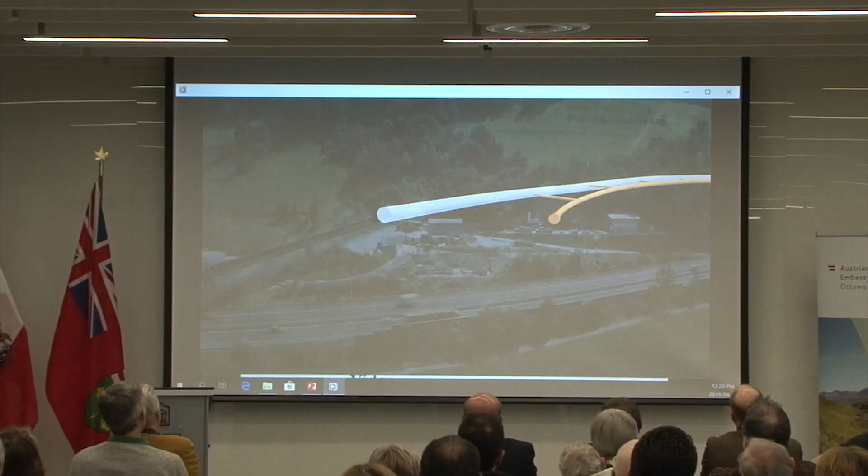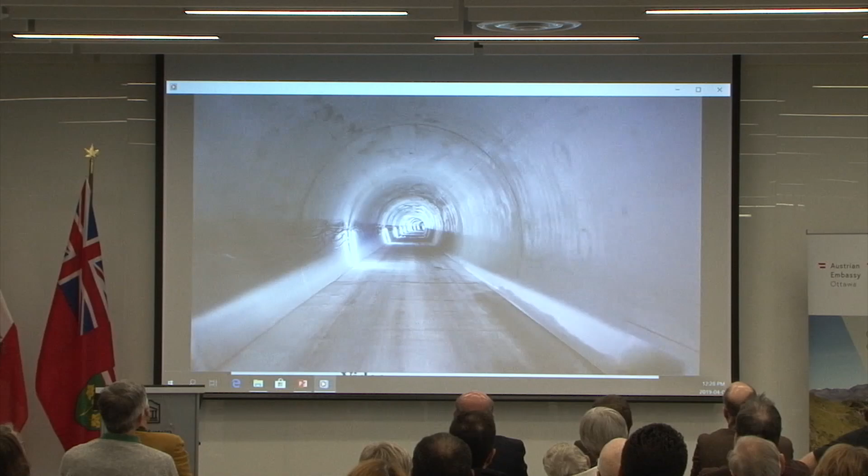Cross tunnels connect the bypass tunnel at 333-meter intervals with the new emergency tunnel, thus bringing the railway bypass tunnel in Innsbruck, which has been operational since 1994, into compliance with subsequent safety requirements. This was the reason for constructing the emergency tunnel.

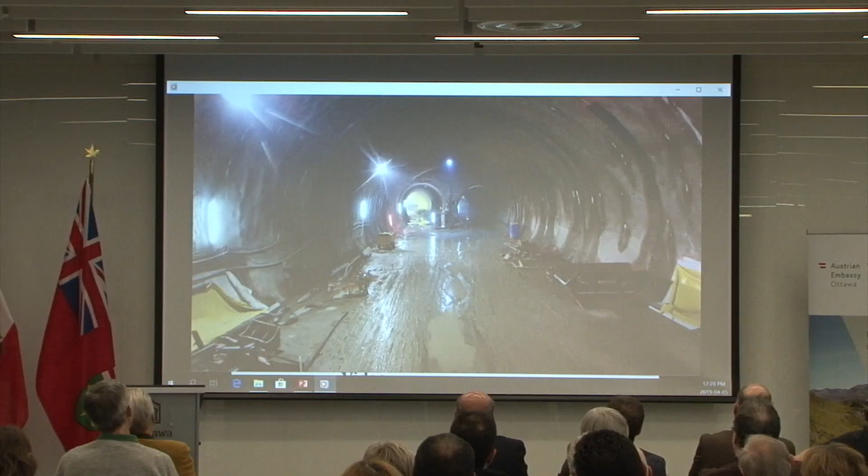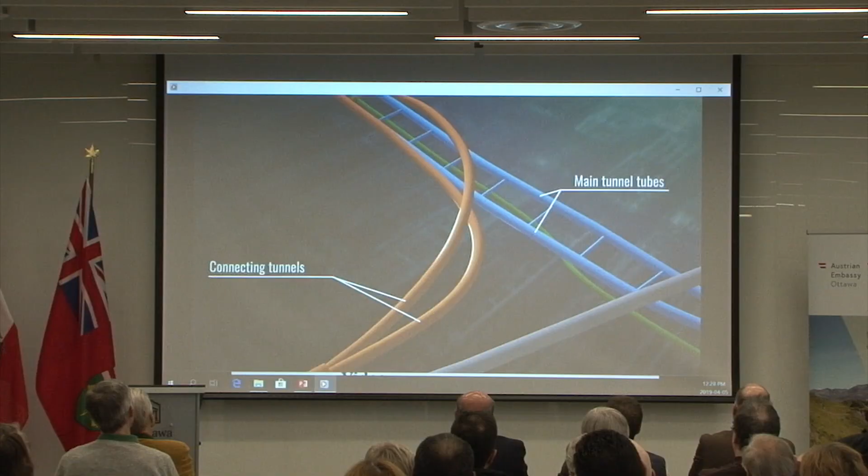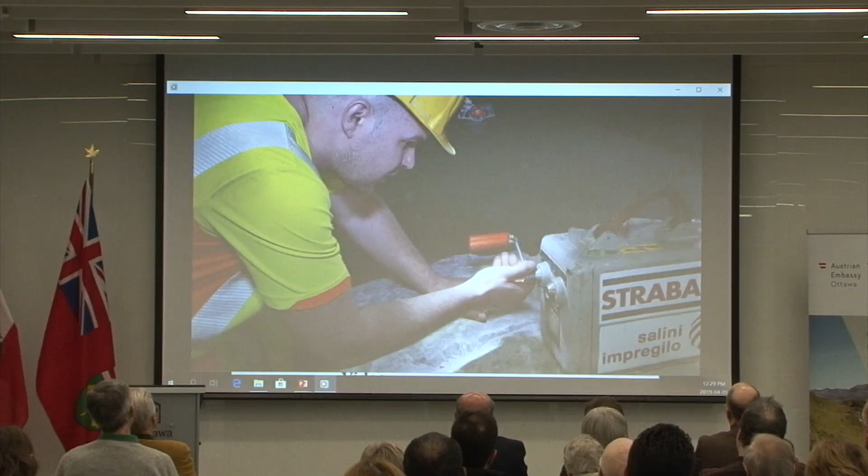Here, about 160 meters below the town of Aldrans, 2 connecting tunnels branch off from the existing railway bypass in the direction of the Wipp Valley. These two tunnels create a crossover in order to allow a fluid transition between the right-hand running used in Austria and the left-hand running used in Italy. The two connecting tunnels took only 2 years to be constructed. The breakthrough took place in the summer of 2017, creating an underground connection between the Inn and the Wipp valleys.

Times like these give the miners and their colleagues pause, and relief is plain to see on their faces.

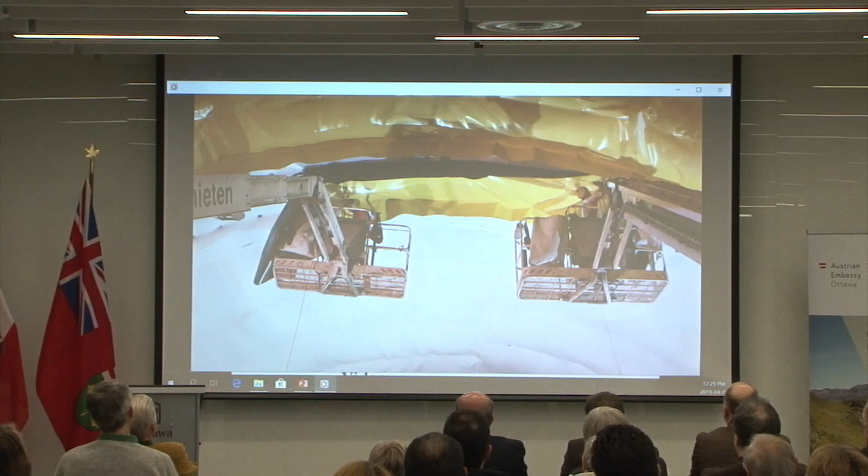Once the excavation works are completed, the internal lining of the connecting tunnels will begin. Inflowing mountain water is drained off to the tunnel invert by means of an insulating film, keeping any moisture away from the tunnel. The reinforcement is then assembled. In blocks of 12.5 meters each, lattice mats and steel bars are woven by hand into a mesh, which gives the concrete stability and durability.

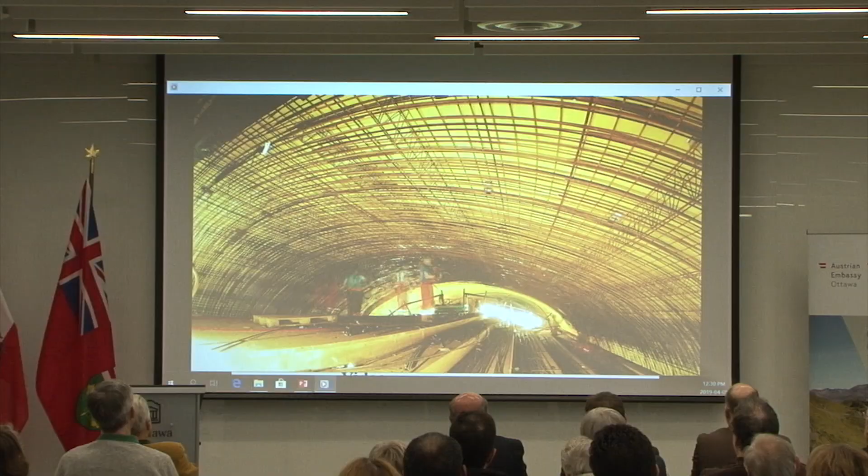The tunnel inner wall is filled with concrete block by block using mobile carriage molds. The consistency of the concrete, the placement and compaction are precisely coordinated so that the concrete has no defects and reinforcement is completely embedded.

After the formwork has been stripped, the concrete is treated with a foil seal. This controls the temperature and humidity of the concrete and minimizes cracking.

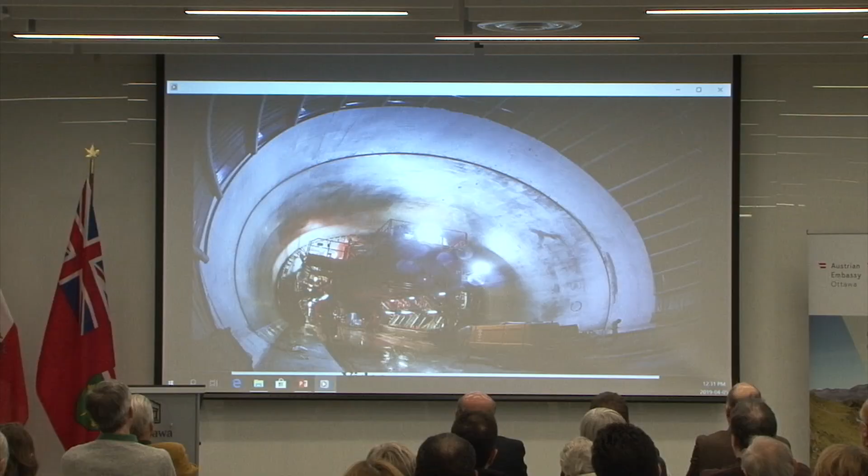For the first time in tunnel construction history, the Brenner Base Tunnel is being built to last at least 200 years.

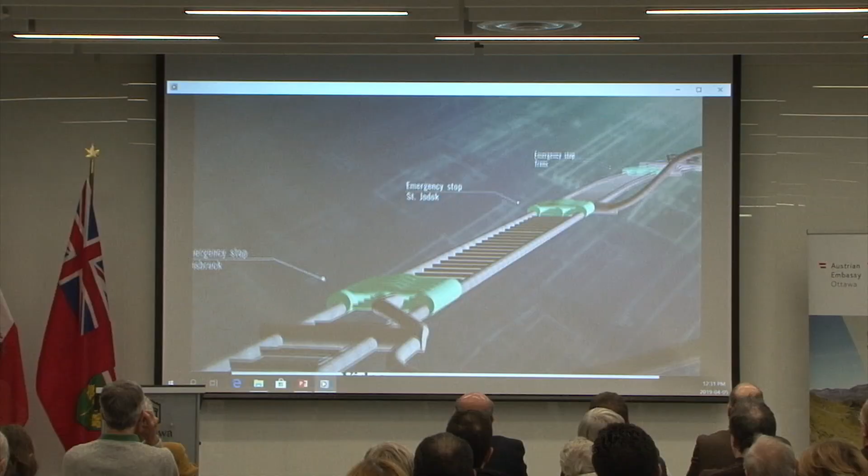The exploratory tunnel is located centrally between the two main tunnels and about 12 meters below them. This is where the first TBM in Austrian territory was used for excavation work.

Since November 2015, the TBM named Günther has been cutting its way through the rock, driving 15 kilometers of the exploratory tunnel towards Steinach am Brenner, starting from a chamber below the town of Patsch, which is connected to the surface by the Ahrental access tunnel.

The exploratory tunnel provides information on the geological characteristics of the rock mass, and will therefore make the subsequent construction of the main tubes efficient, fast, safe, and cost-effective.

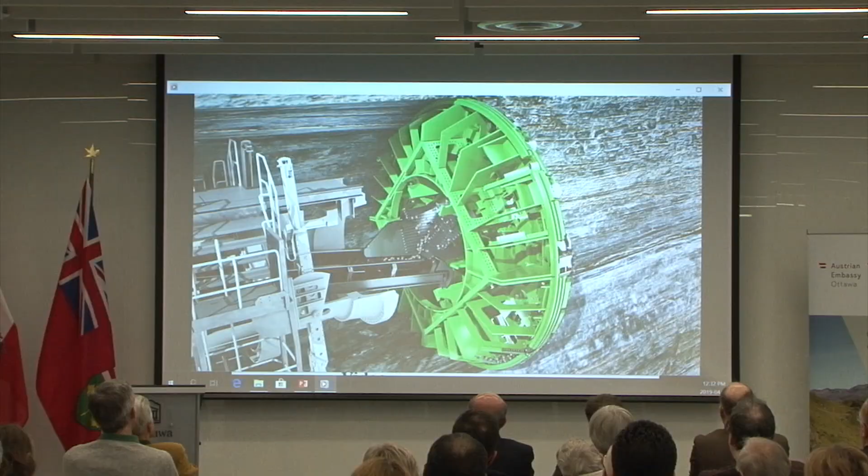The TBM is 180 meters long and has a diameter of 8 meters. The boring machine head is equipped with disc cutters, which rotate slowly and constantly, while the TBM pushes hard against the rock face, digging its way through the mountain.

Behind the cutter head, the backup provides for consolidation work through installation of tunnel linings and anchors, steel ribs, reinforcing steel mats and shotcrete.

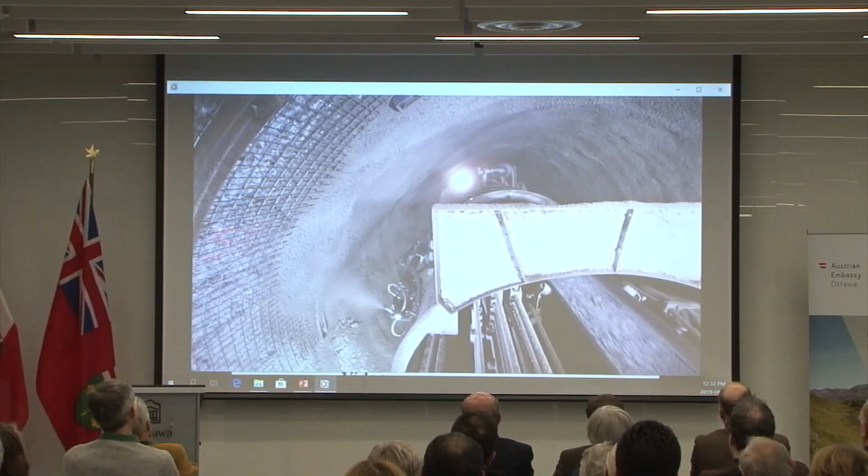The tunnel floor is built with prefab concrete elements, the so-called tubbing rings.

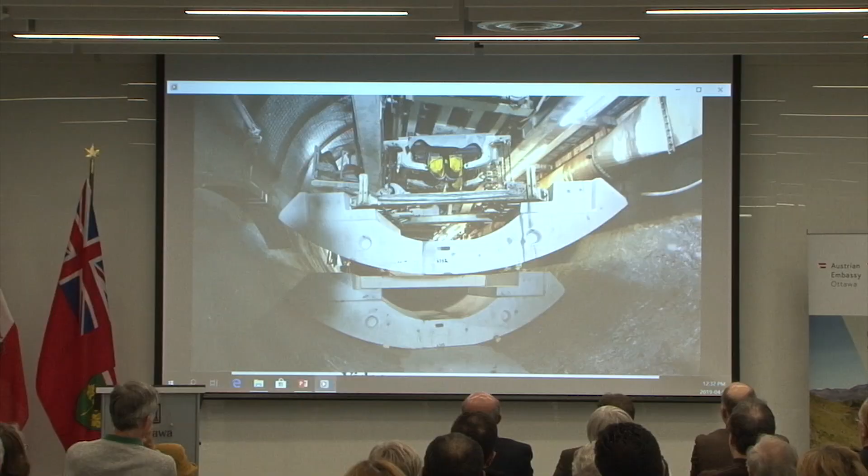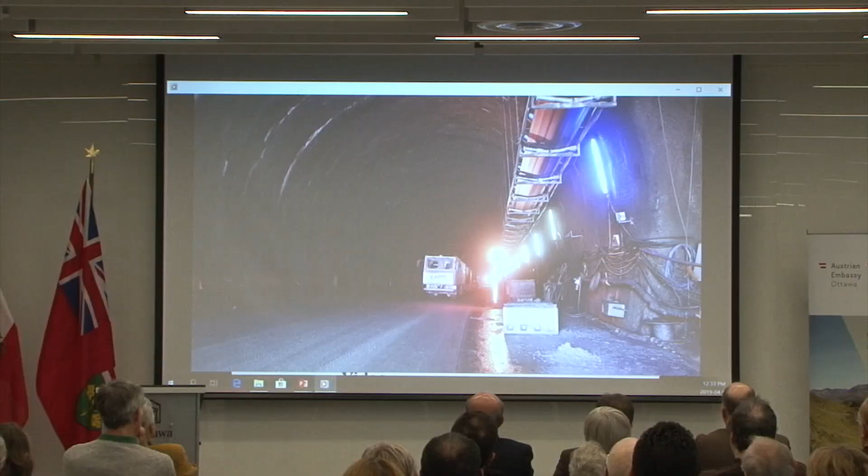Fully automated multi-service vehicles shuttle back and forth to the TBM to supply construction material, concrete, and prefab elements.

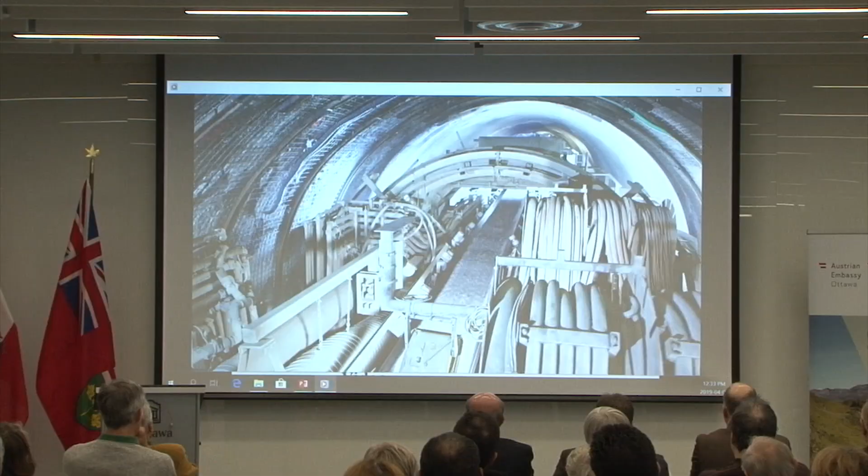Tunnel spoil is transported on a conveyor belt system. All material taken from the mountain must be returned to nature.

Here in the Ahrental Valley, approximately 2.6 million cubic meters of excavated material will be relocated along the Brenner Highway. Great care is taken to ensure that the disposal site is embedded into the landscape in the best possible way, to create new available land in the future that will be gradually replanted and covered with green growing things.

Another construction site for the Brenner Base Tunnel is located in the municipal area of Steinach am Brenner, in the district of Wolf, where the Wolf construction lot was completed in the summer of 2017.

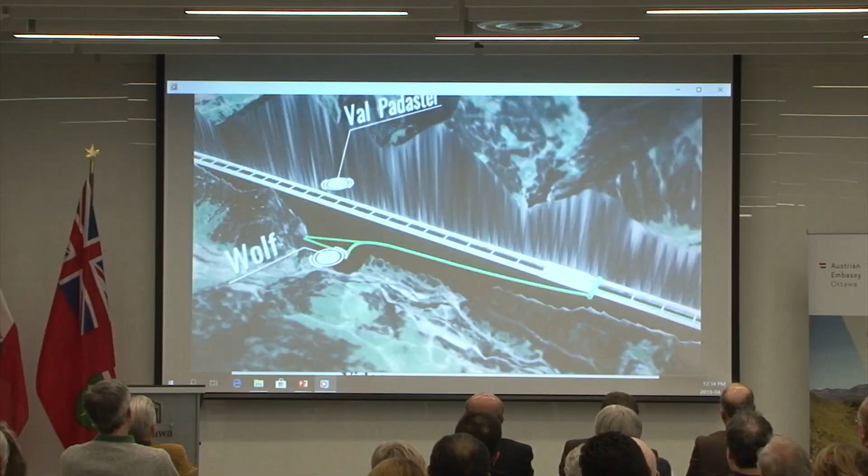The works of the Wolf construction lot, which included the construction of the 4-kilometer-long access tunnel, a large underground chamber, and 1.2 kilometers of the exploration tunnel, started in 2013 and were completed in the summer of 2017.

Subsequently, further excavation work northwards and southwards, the construction of the Sant Jodok emergency stop and of the stretch of the exploratory tunnel towards the Italian border will start from here. Soon, several tunnel boring machines will be put into service at this site.

The largest disposal site for excavation material, the Padaster Valley, is also located in Steinach. After the completion of construction works and revegetation, this deeply cut valley will become arable land.

The Padaster Brook will be rerouted to a new bed on the surface, and new wooded and pasture areas will be created. About half of the excavation material of the Austrian project area will be deposited here.

The excavation material is transported to this disposal site using underground conveyor belts, and the local residents hardly notice it.

People always ask me, what are compensatory measures? Working in BBT SE, we are aware of the effects of major construction sites. Therefore, we do a lot to compensate those impacts.

This is also why we finance and implement significant improvements to habitat and nature in our project area. Habitats, wetlands, and moorland are revitalized and expanded as recreational areas for the population.

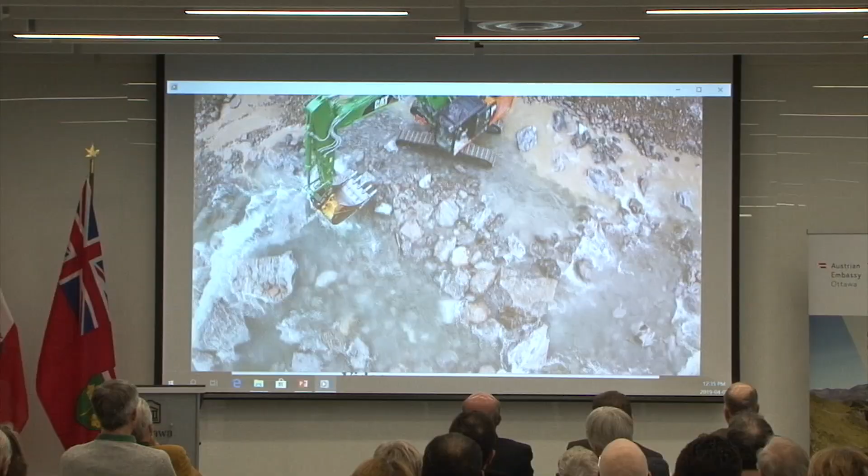The river courses of the Isarco River and the Marita and Sil brooks are being rerouted. This means fish can swim upriver again and reach their spawning grounds, and these mountain brooks will regain their original characteristics. In the next few years, a total of 250 such compensatory measures will be implemented.

In the BBT tunnel world in Steinach am Brenner, near the valley station of the Bergeralm ski slope, information about and closer glimpses of the major Brenner Base Tunnel project are available throughout the year.

In 800 square meters of exhibition space and in the display tunnel, you can experience tunnel construction in a fun and instructive way and get the latest information about the project.

Not far from the tunnel world, the new circular walking path in the Padaster Valley offers a spectacular view over the disposal site and provides information on the spot about the site and the nature-friendly measures which were carried out.

Once a year, the tunnel construction sites in North Tyrol and South Tyrol are opened for interested visitors, such as in October of 2017, when thousands of visitors got the chance to see the fascinating world of tunneling up close on the Ahrental, Mules and Isarco River underpass construction sites.

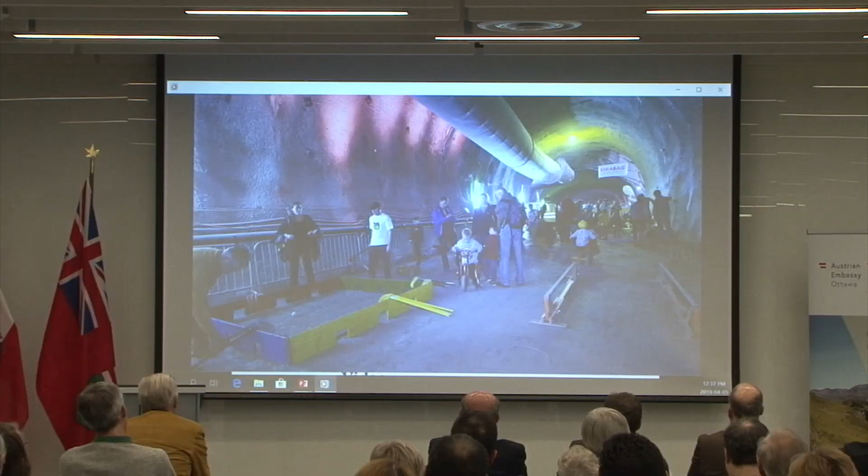Employees of BBT explain facts about tunneling, geology and topography. Tunnel tours make it possible to view the work in progress in the project area. A special entertainment program for all ages makes the open tunnel days a special experience. And who knows, perhaps someone will have the chance to find their true calling.

So this gives us a little bit of flavor about the project itself, and now I would like to continue with the presentation, talking a little bit more into detail about the different issues regarding the project itself.

It is a base tunnel. We are trying to reduce actually the slope, the existing slope of 28 per mil to approximately 7 per mil. So it is a real base tunnel.

As you saw already, there are 3 tunnels. Why? The so-called exploratory tunnel is used on a worldwide level the second time. The Channel Tunnel between France and England also has 3 tubes over there. But the third tube, the middle tube, is used for maintenance and for emergency purpose.

Our tunnel is used for, first of all, exploring the rock mass. Secondly, for additional services during the construction phase. And finally, it's a possible tunnel taking all the rail equipment we need, the machinery, the ventilations and so on - they can be placed over there in order to have no interaction with the existing, under operation, main tunnels. And this gives us a big advantage regarding other big base tunnels like the Gotthard tunnel.

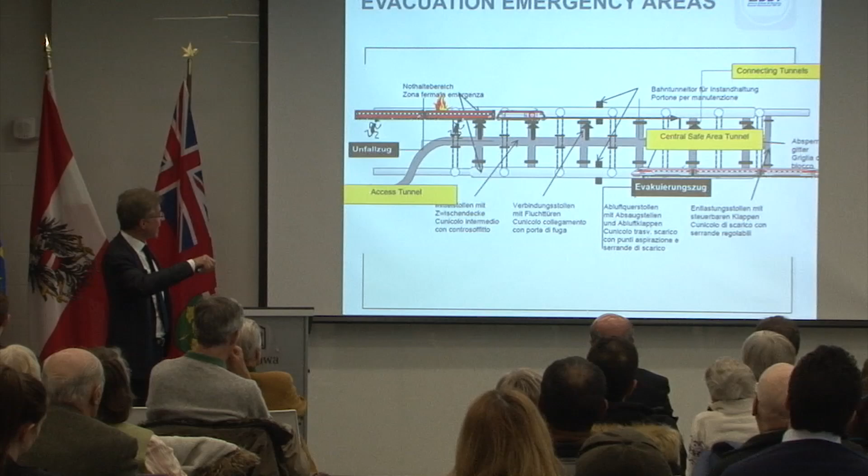If a train runs into the emergency zone with a burning fire on the train, then the passengers can go out, they can walk to the central safe area, and another so-called evacuation train can come and pick them up. With our specific access tunnel directly connected to the central safe area, we are able to take the passengers out also by car. This is a big advantage.

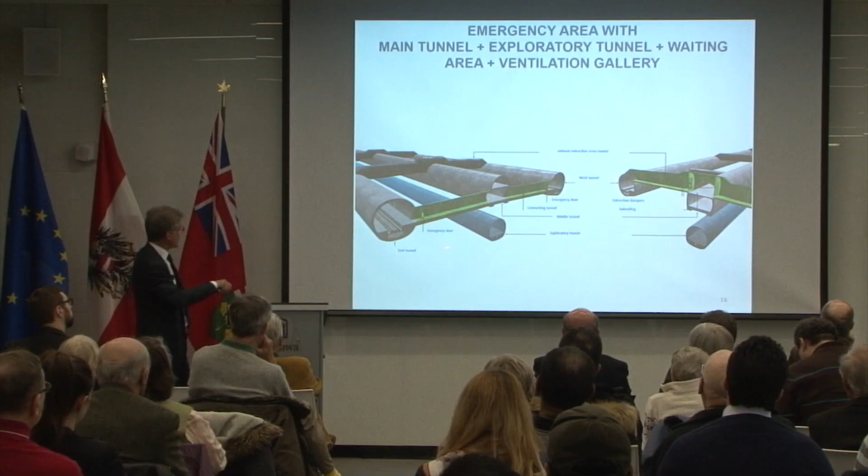You see it in another layout over here. It's quite complicated from a geotechnical standpoint, not an easy system. But nevertheless, this is the exploratory tunnel.

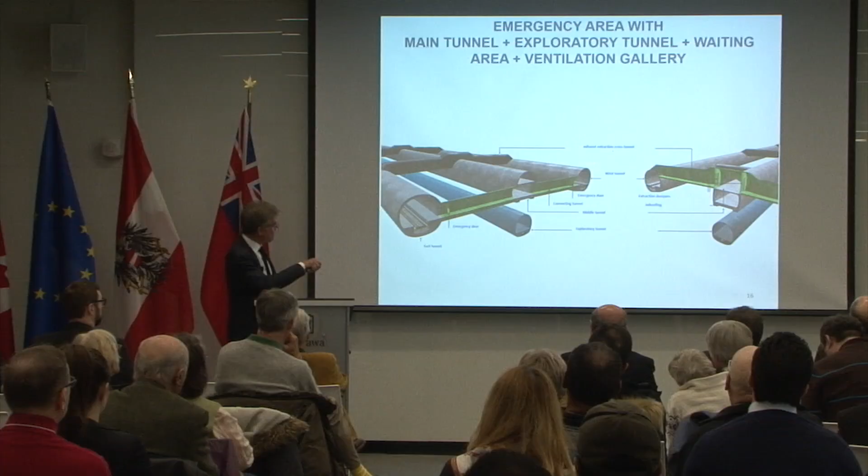The main tunnel, the cross passage tunnels, every 333 meters, specifically in the emergency zone every 90 meters. And then we have in the middle the so-called safe area zone, and above them the ventilation system, which extracts some air or some smoke coming from a possible fire and so on.

Now, the rail equipment is another big issue. It is a very easy task on one hand. On the other hand, we have to prepare the tunnel layout also for the future, for the upcoming technologies. And therefore we try to have the carriageways laterally on the same level in order to implement, probably in the future, also some magnetic system.

Or there is the so-called electrical supply, and there are different voltages. In Italy, 25 kilovolts, in Austria, 15 kilovolts, at 16.7 hertz - different frequencies and so on. And this makes life a little bit more interesting.

Now, the main data are 64 kilometers length. The total length of the whole tunnel system is 230 kilometers, with a maximum overburden of 1,800 meters - you don't feel that if you are in the tunnel. The maximum speed of the freight trains will be 120 kilometers per hour, and passengers 250 kilometers per hour.

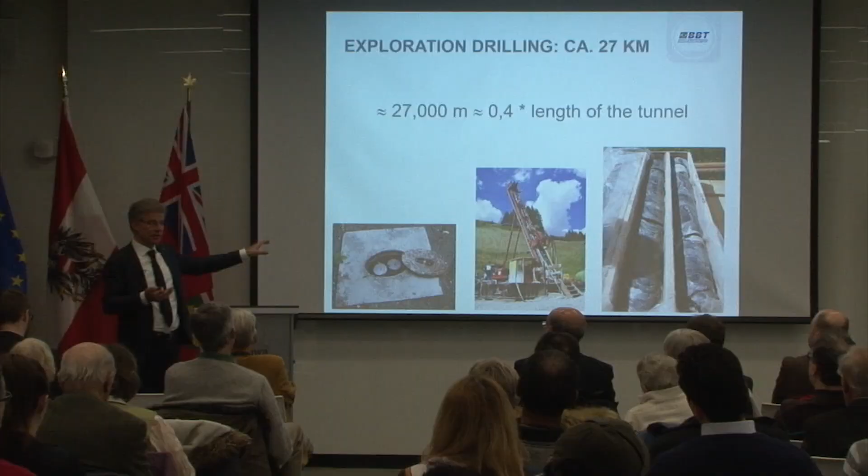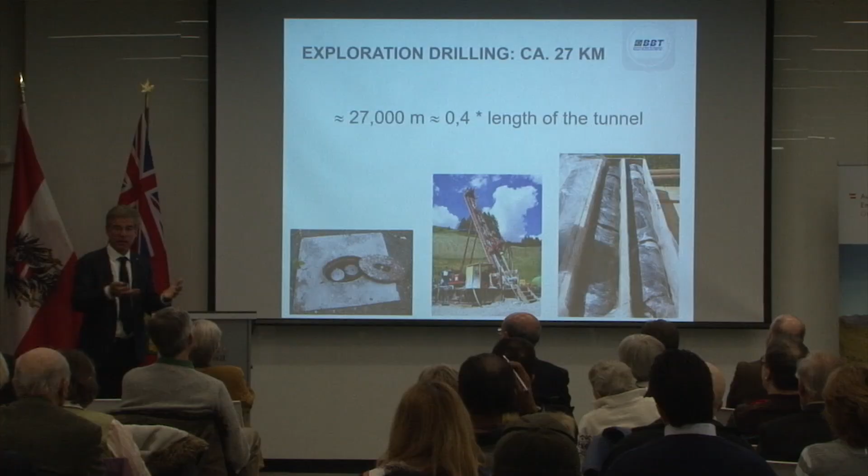27 kilometers means approximately 40% of the total tunnel length have been drilled vertically. I did some research comparing other projects. In the Gotthard tunnel, they did approximately the same vertical drillings. In the Semmering tunnel, with a length of 27 kilometers, they did almost 90% of the total tunnel length. So it depends on the complexity of the rock mass and also on the financial possibilities.

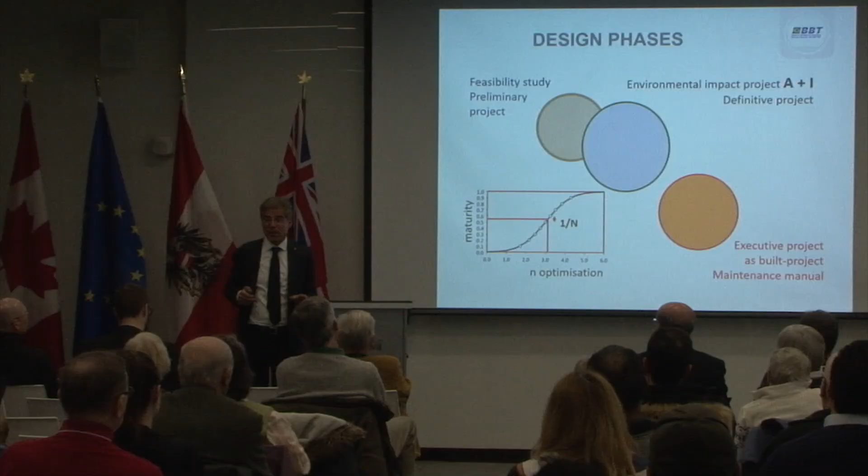Now this is more related to the engineering world. In a normal project program, you carry out the feasibility study, the preliminary project, the definitive project, and the executive project. We developed a guide design phase between the so-called procurement phase and the definitive project.

We had different environmental measures in Italy and in Austria, different philosophies and so on. And I came up with the idea: what can we do having different design procedures in both countries?

So we developed our own design procedures, our own guide design, on the basis of a so-called holistic approach, including not only the structural safety, robustness, and serviceability, but trying to include also the maintainability, the life cycle management, the environment, the society, and the social performance.

We came up defining, for the first time in the world for a big project, a life cycle approach, including the different cycles of maintenance, of upgrading, and so on. And we developed our own design procedure on the basis of a service life of 200 years.

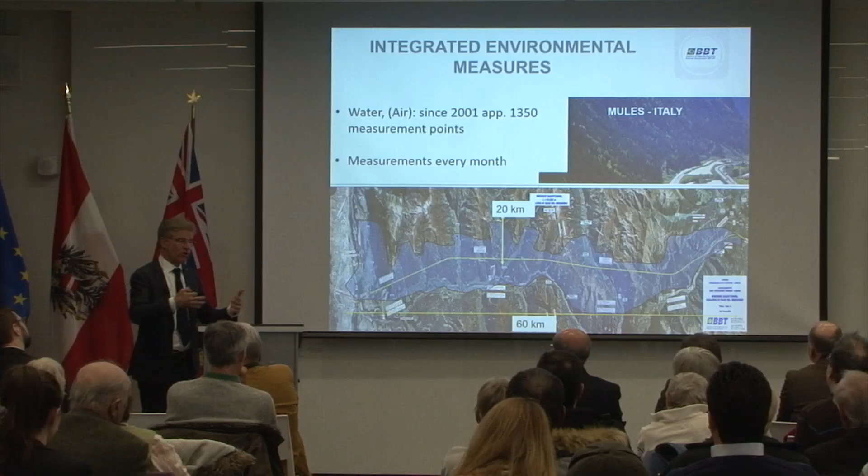I was very surprised, and I'm still surprised, how precisely they can detect in the tunnel, with an overburden of more than 1,000 meters, from which water resource the water in the tunnel is coming. It's amazing how precisely they can distinguish the composition of the water in the tunnel.

We do the measurements on a monthly basis, and we deliver the data every second month to the authority. The geology—clearly, that is another big issue.

Two thirds of the total exploratory tunnel, approximately 40 kilometers, have already been excavated. So we know a lot about the geology. We know a lot about the aggregates and the composition of the stones.

But now the problem comes in that we have tried to reduce the disposal areas, the disposal volume. We want to reutilize the excavation material as a building material, which is also the basis of the sustainability. We have been able finally to work out, together with universities, with 5 PhDs, a system, a proposal to recycle the schists with a uniaxial compression strength which is quite high, 75 megapascals.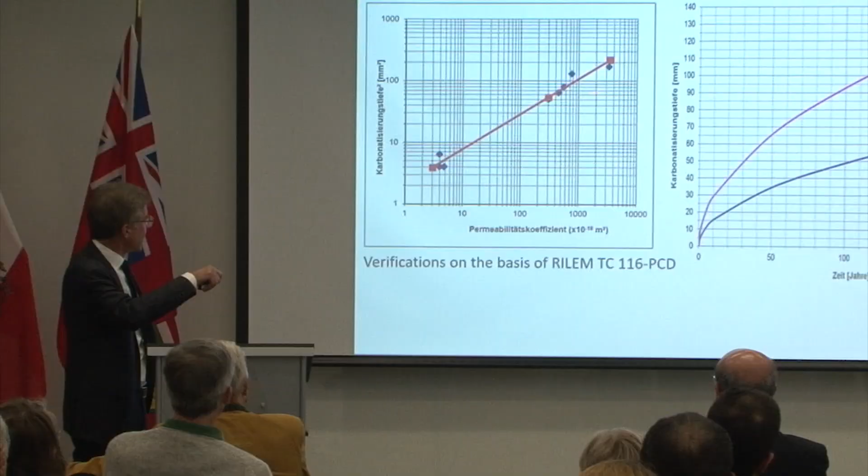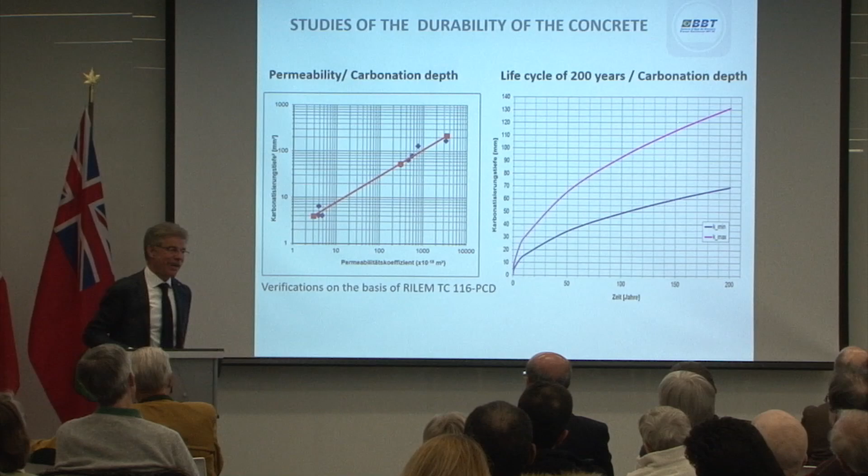We did a lot of intensive study on that, and we came up, on the basis of Fick's law, with a method to analyze the so-called carbonation depth, which is very well known in bridge design, chloride penetration, and so on. So what is the main objective over here?

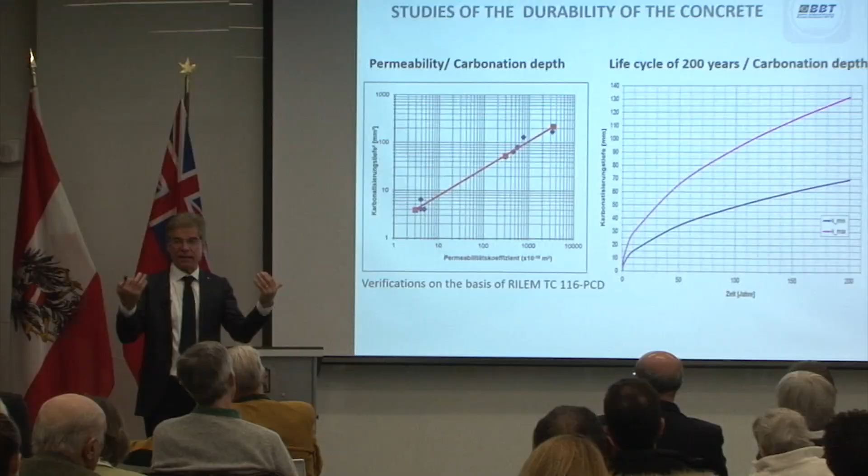The main objective is to have a very dense concrete, but it must be produced in a way that the concrete itself still has a certain flexibility when it is exposed to fire, since you need a certain volume of pores there in order to have a certain elasticity.

5 million cubic meters of concrete has to be cast. 60% of them cast in place, 20% for linings, and 20% for the sprayed concrete, approximately.

So quality control is very much needed. The companies have their own laboratory. We are relating also to the local universities. We are trying to involve the laboratory there, and we do have our own laboratory in order to be able to prove at all times the quality of the concrete itself.

Costs. Approximately 8.5 billion euros is the cost of the total tunnel. We have been able to keep the cost stable for 12 years, and I'm sure that we will keep the costs also in the future. The tunnel structure itself costs approximately 60%. The installation, the drain equipment, 14%.

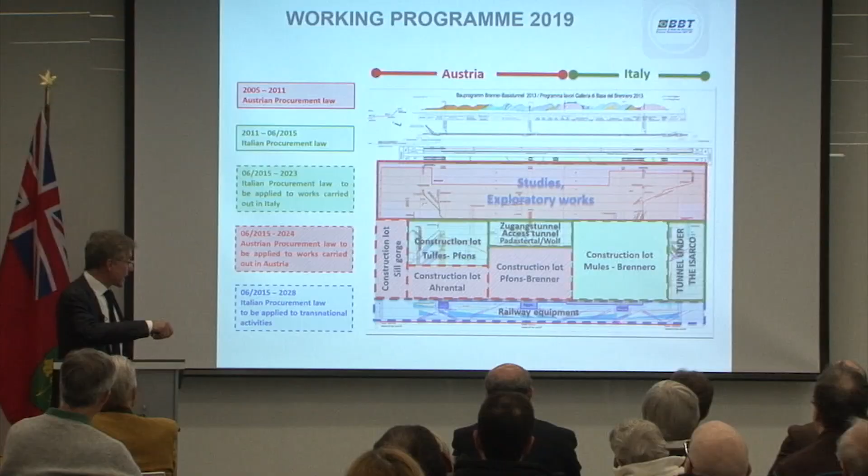Working program: the procurement has been done first in Austria for the so-called first phase, then on the basis of the Italian procurement law, and finally some construction lots are now also tendered under the Austrian procurement law. The so-called railway equipment still has to be tendered in the next year.

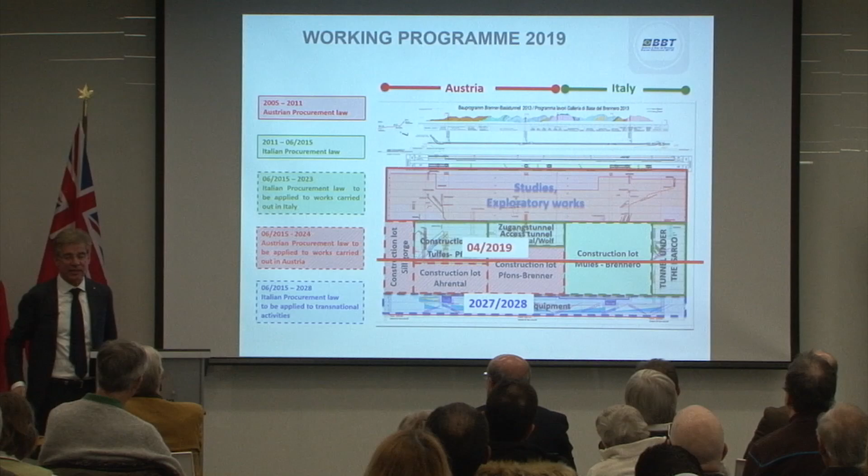We are not going into detail, but we want to finish our work in 2027, and we reserved one year for the so-called pre-exercise in order to train the rail system and try to promote it. So what did we learn till now?

We learned that in order to promote such a project, but also in order to promote a project in a city, you need a coordinator. The coordinator must work as an accelerator, together with some international experts. Otherwise, they don't believe them anymore. This is a big issue.

Then you have to have a vision for the next 20, 50 years. You have to have a communication strategy and a strategy for environmental protection. It is very important to work out a technical guideline, including life cycle management, cost and risk management, and specifically for infrastructural projects, to have a clear vision about intermodal and multimodal mobility, how to change the modal transportation systems and so on.

Another 7-8 minutes: 40 kilometers of the exploratory tunnel have been built, 100 kilometers are excavated, let's say, at the end of May of this year. Then we have to go further. We will be able to excavate approximately 20 kilometers this year on 4 construction sites.

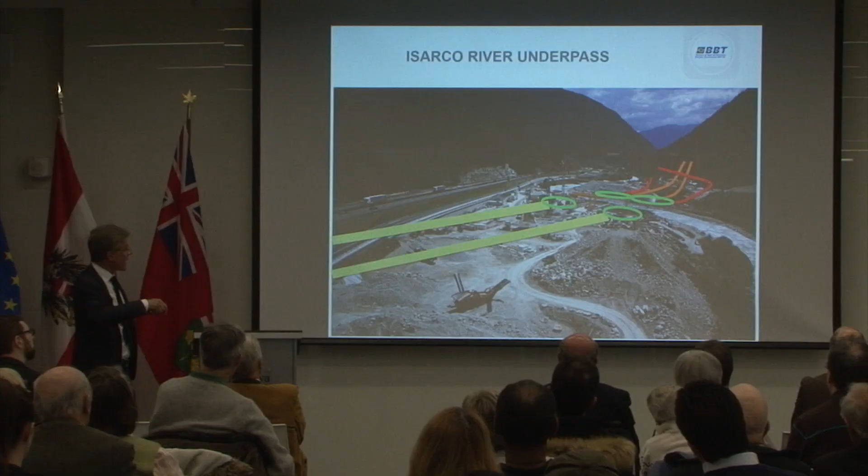A very interesting construction lot is the underpassing of the highway and the river Isarco over there. By creating vertical shafts and using freezing technology, we are underpassing the traffic infrastructures and the river itself using this kind of technology.

Now, optimizing drilling innovations, we developed our own system based on the so-called performance-based excavation methodology. We have our own geologists going on site daily. They stay in the tunnel 8 hours, trying to work out how the mountains, how the rock mass behaves. They interpret the behavior geotechnically, and finally transfer the data out to the back office.

I was using a sentence from Confucius who said wisdom, compassion, and courage are the three recognized qualities of men's decisions in tunneling.

This is a small drawing of what the geologists are doing. We use boreholes, drilling a hole in order to see how the rock could behave. We also use scanning methodology to have 3D imaging of the borehole, doing laboratory tests, trying to figure out the fault zones. Finally, this cannot be done if you use a drilling machine.

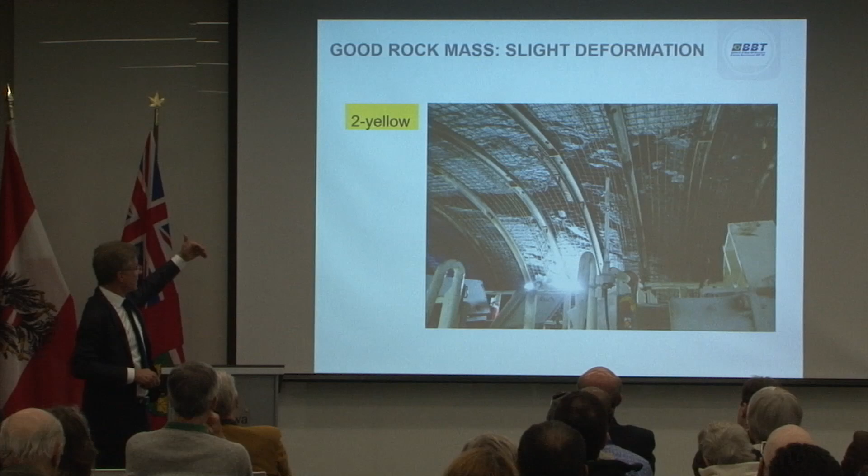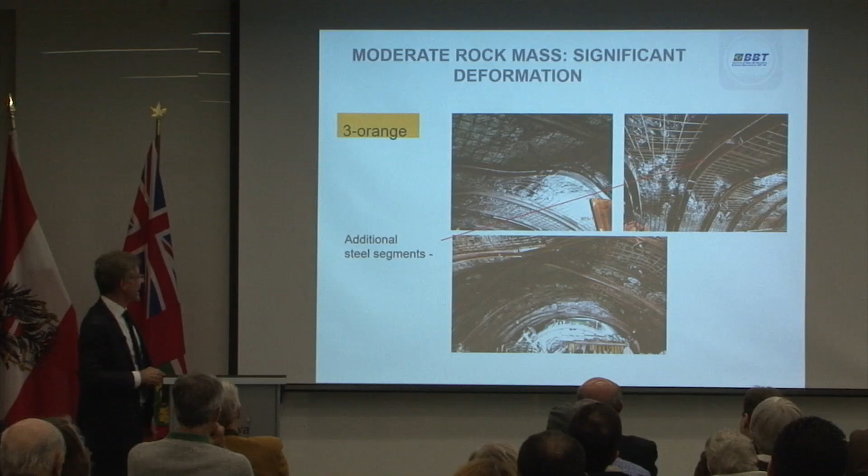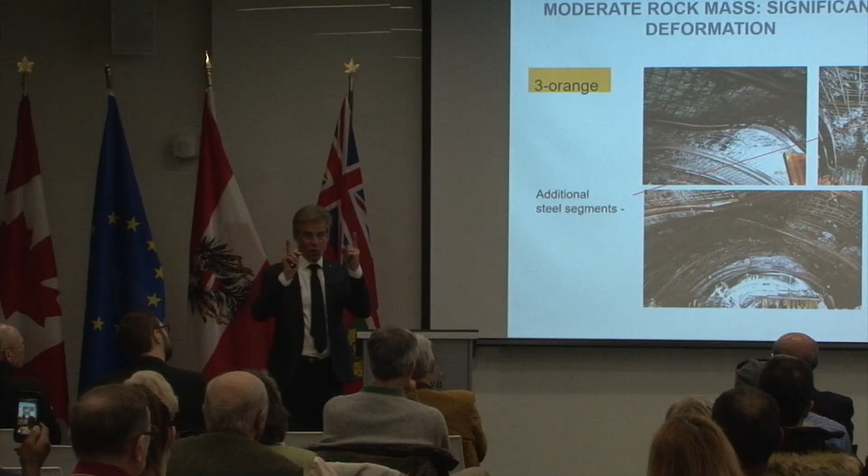Now we are classifying the rock mass in 4 categories. The green one, only with a little bit of support. The yellow one, which needs some additional rock bolts. The orange one, as you see over there, the rock behaves quite heavily, they are able to deform the steel arches very well. And if you are in the tunnel there and you hear the breaking, the failures, and you know that you have more than 1,000 meters above you, it is a quite interesting feeling.

Then I developed a very specific post-compressible steel arch system for very heavily pressed rock masses. We also tried, with another PhD student from Greece, the idea to use digital imaging in order to reduce the so-called extra profile, to have less tolerance by drilling and blast.

We are doing nothing else but trying to make a digital picture, mixing statistics together with experience, trying to optimize the drilling scheme, nothing less. So this is a picture of the front. Then you see some pictures of the last 5 drill and blast stretches, added together, trying to optimize the drilling scheme.

The overbreak limit is approximately plus 25 centimeters. The prediction line based on the forecast from the developed method is the red line over there, and the new drilling line is the inner line over there. We have been able to reduce the overbreak by 65% through this methodology.

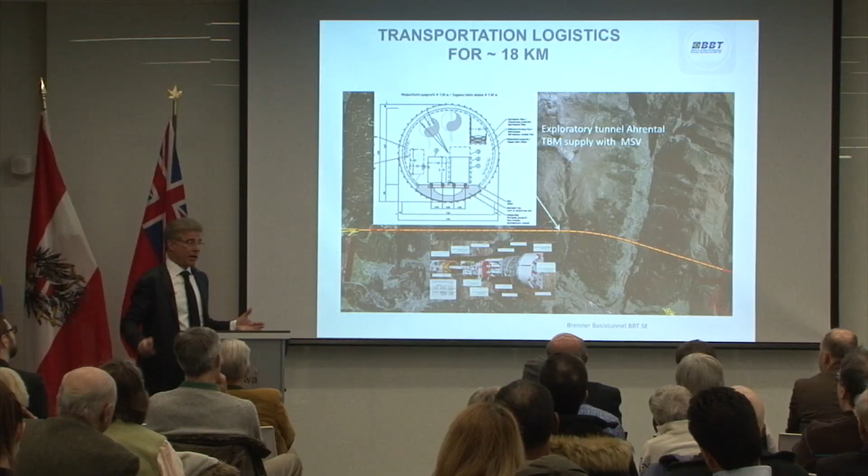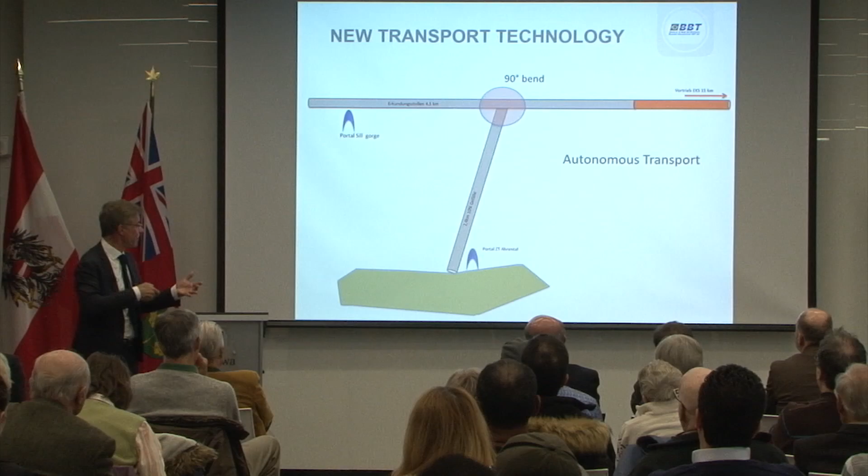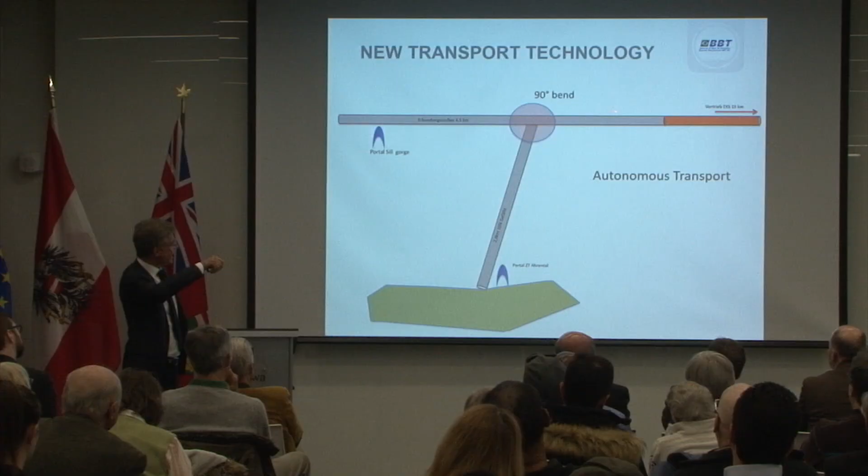Another short innovation, and then we stop. We had the situation that we had to bring material into the tunnel over a total length of 18 kilometers. In traditional tunneling, you use rails or tracks. The idea was to develop a so-called autonomous transport vehicle to bring the material, the building materials, crossing the access tunnels, turning around by 90 degrees and going along the 15 kilometers of the so-called exploratory tunnel, with different slopes there as well.

This was the special vehicle, developed by a Swiss company. It can create a big chain of vehicles, and we have been able, for the first time in the world, to transport 90 tons. Before, they had only been able to transport approximately 30-35 tons. With newly developed machinery, we were able to develop that.

And then we started trying to use them also as an autonomous material transport system. You will see that on the film. We started that experience last December without a conductor. There is nobody there.

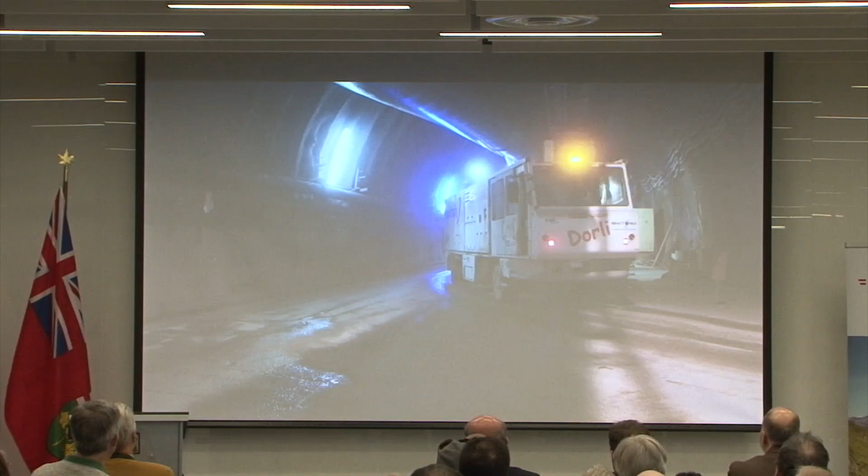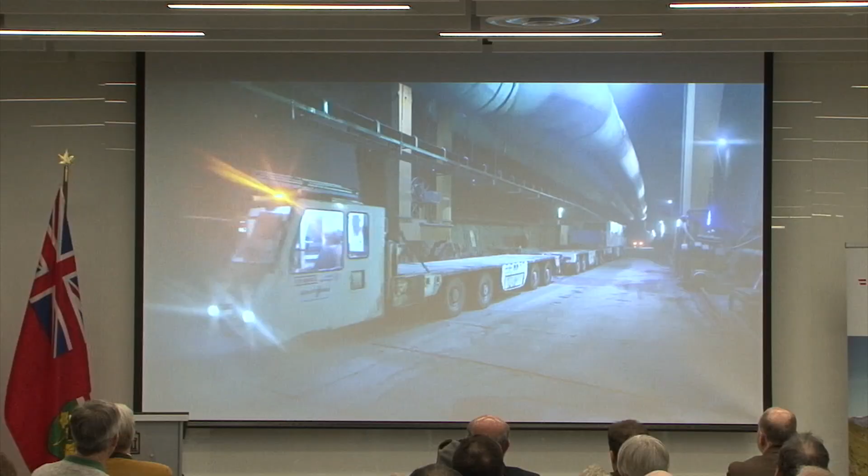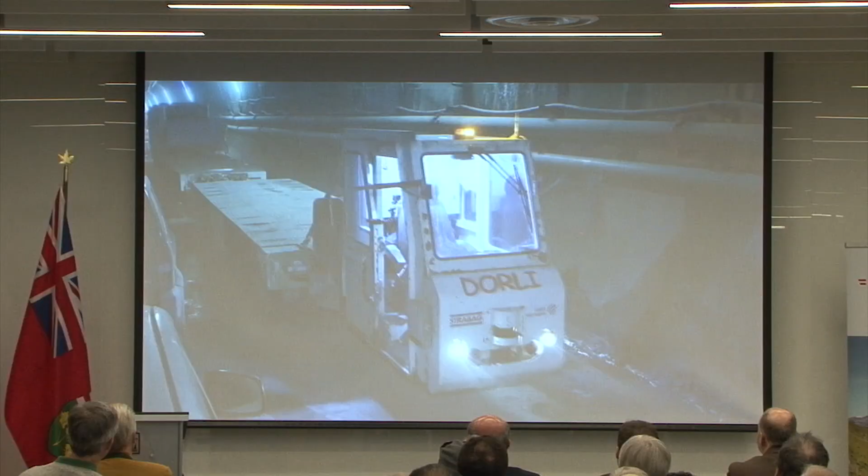Stops on the street light. That's around the curve. The velocity is approximately 23 kilometers per hour. Comes close to the big machine. Goes into the drilling machine. Distance over there is 25 centimeters.

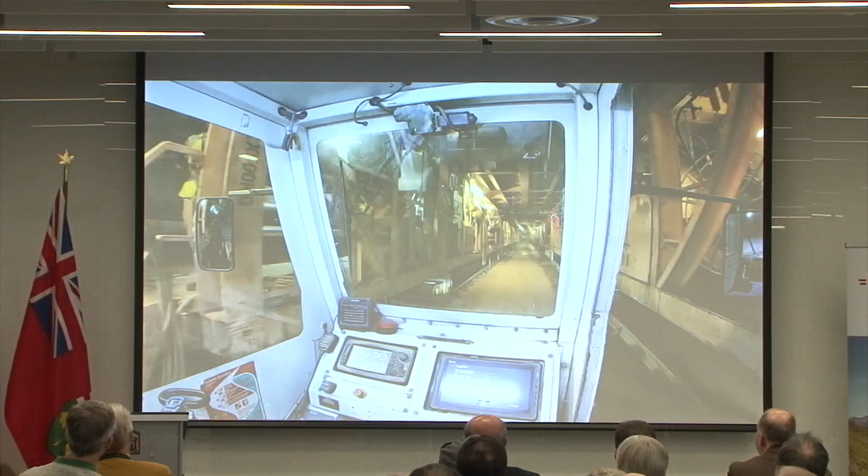So this was a first try. We wanted to start that already 3 years ago, but the safety inspector didn't allow us that. And so we had to do a lot of measurements, a lot of research, and finally we have been able to promote it. The last topic, I would like to talk a little bit about communication.

My proposal was always we have to communicate on each level, on the so-called young people level, on the family level, up to the scientific level. We do have 3 information centers, open 6 days per week. We have more than 25,000 visitors per year.

We are trying to promote the project also locally through the news channels, information centers, open tunnel days, as you saw already, some internet portal, and the so-called Brenner corridor platform, which is nothing else as a platform to promote measurements for the future. A very important issue was that you have to integrate the local traditions.

In 2007, we had a lot of oppositions against the tunnel project. And so I came with my own choir to the open day. It was the first time. So the local priest and the local choir didn't sing. So they said, no, we don't want the project. Finally, and so I came with my children, my family, and so we tried to promote it. Some people have been there.